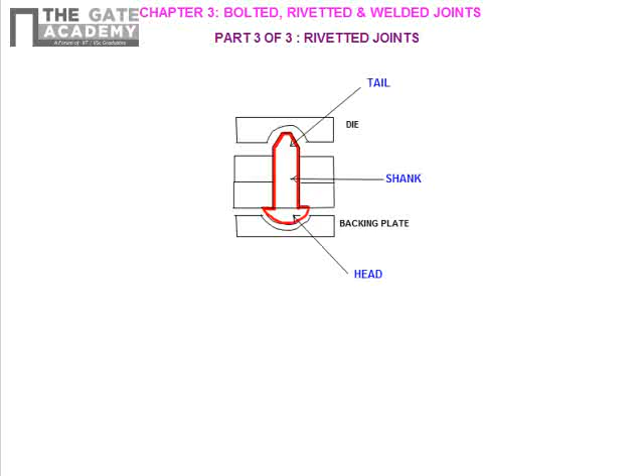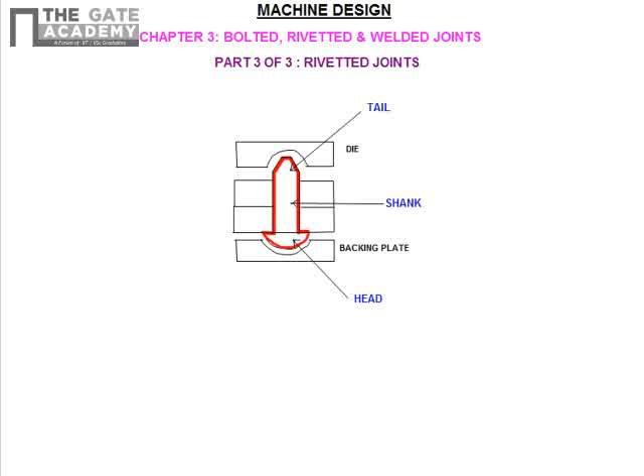So we'll come to the third part of this chapter on machine design: bolted, riveted and welded joints. The third part will be the riveted joints. Till now we have seen the bolted joint as well as the welded joints, and we have seen how to design the joints for a given kind of loading. Now we will see about the riveted joints.

Riveted joints, unlike the bolted joints, are a permanent joint in the sense that they cannot be removed at any time of assembly without causing damage to the plates.

A rivet is shown here. This rivet has three parts basically: the head is this portion, the flat portion is called the shank, and the tapered portion is called the tail. So how is this riveting done?

Riveting is done for joining two plates, 1 and 2. What we do is we drill a hole in both the plates, we bring the plates together, we keep the rivet here, and we have something called a backing plate which is kept at the head of the rivet. We have a die which has the same shape as the head, and force or pressure is applied on the die plate so that it gets deformed into a shape like this.

So you get the same kind of head on both sides after the riveting operation. The riveting operation can be done at room temperature as well as at high temperature. When the riveting is done at room temperature, it's called cold riveting, and when it is done at a higher temperature, it's called hot riveting, because it's basically causing the permanent deformation of the rivet. The tail portion of the rivet gets permanently deformed and comes to the shape of the head. So it's a plastic deformation of the material taking place.

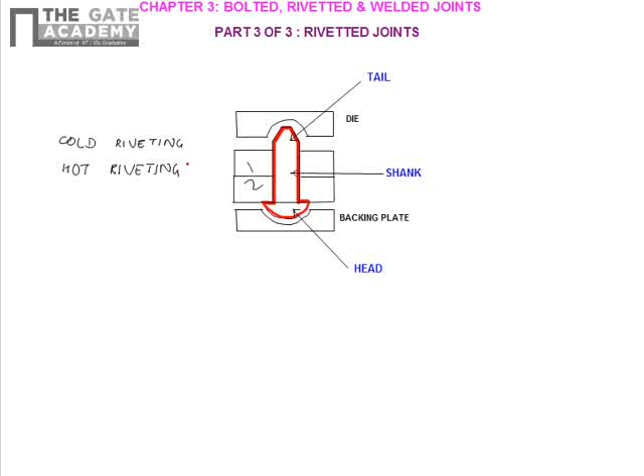Now we'll see the different types of riveted joints. Basically there are two types: one is called the lap joint, and one is called the butt joint. These two joints we have seen already in bolted joints as well as in welded joints. We'll see how a lap joint looks like.

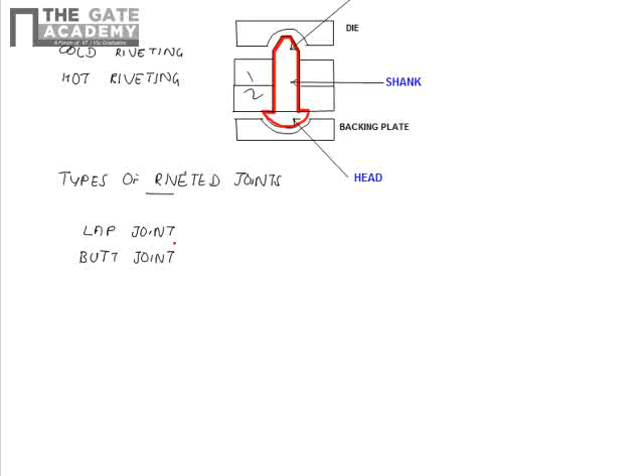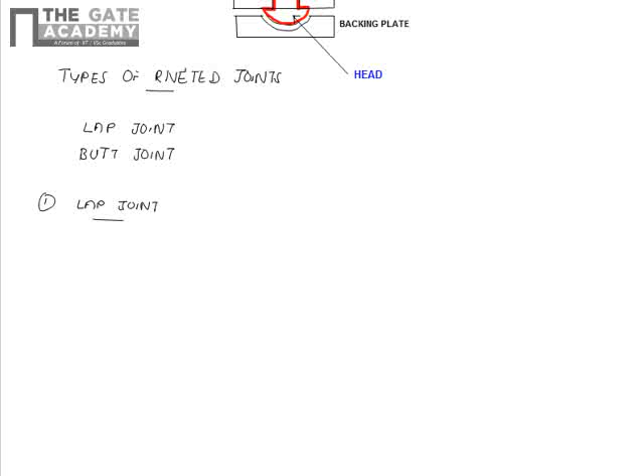Now we'll see the lap joint. The lap joint is nothing but a joint in which the plates that are to be joined are brought face to face such that an overlap exists, as shown in the figure. Then the rivet is inserted in this position, and a die plate is kept on top of the rivet, and force is applied, causing the tail of the rivet to get deformed into this shape. Thus the joining of the plates is done.

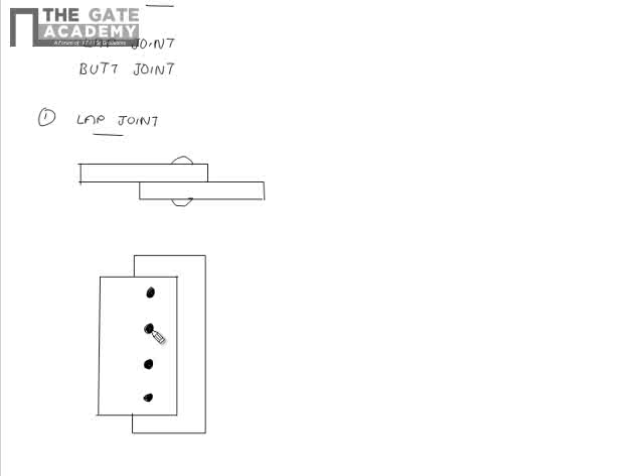So if you see the top view, you can see 4 number of rivets along the length of the plate, and this is one single row of rivet. This is a case of single row of rivet.

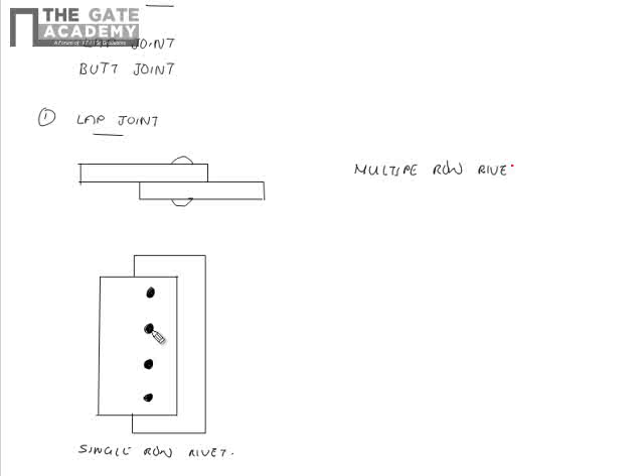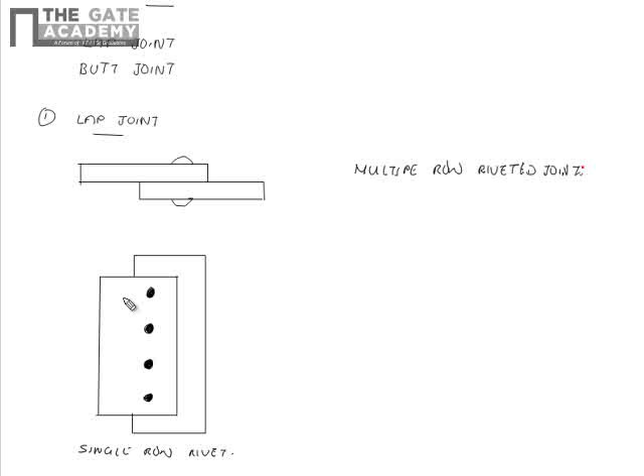We also have multiple rows of rivets. Multiple row riveted joints will be more strength joints. And when multiple rows are used, how to arrange this rivet? You can have a similar kind of rivet arrangement parallel to that, or you can have a zigzag arrangement. So we will see what is a multiple riveted joint.

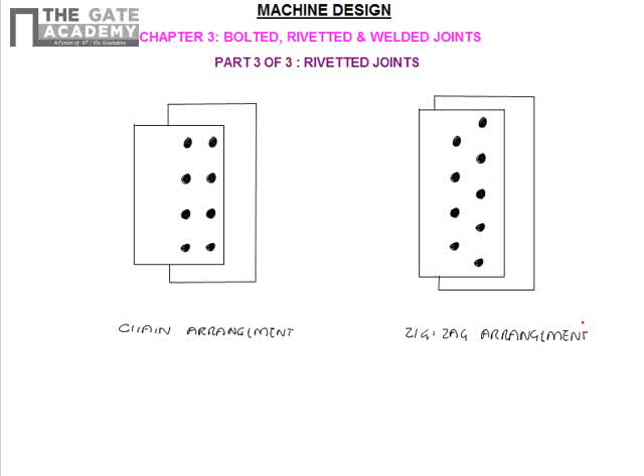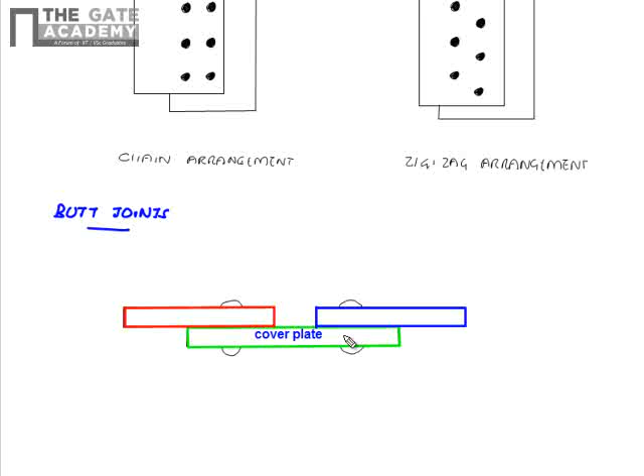Now we'll see about the butt joints. One of the butt riveted joints is shown here, in which the plates which are to be joined are brought to each other without forming any overlap, and riveted joints are formed between each of the plates and one or two of the cover plates. In this case, only one cover plate is used. These two plates cannot be joined directly, so they are joined to a cover plate which holds both the plates together. Depending on the number of cover plates, the butt joints may be classified accordingly.

Depending upon the number of cover plates, we can classify it into single strap butt joint and double strap butt joints.

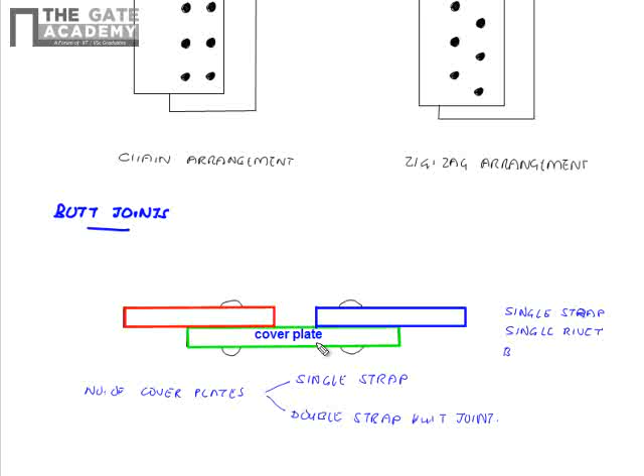The difference between single strap butt joint and double strap butt joint is that in single strap butt joint you have only one cover plate, shown here. I'll write this as single strap, single riveted butt joint, because it is having only one row of rivets and only one cover plate. Since it has one cover plate, it's called single strap. Since it has one row of rivets in one plate, it's called single riveted, and this is a kind of butt joint. A multiple rivet single strap joint is also possible.

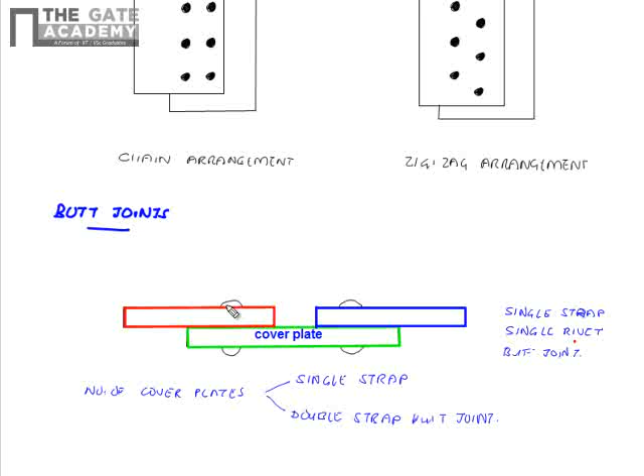When you have a second row of rivets parallel to this, it's called a double riveted single strap butt joint. Similarly, if you have one more cover plate, it's called a double strap double rivet butt joint. That is the classification of butt joints.

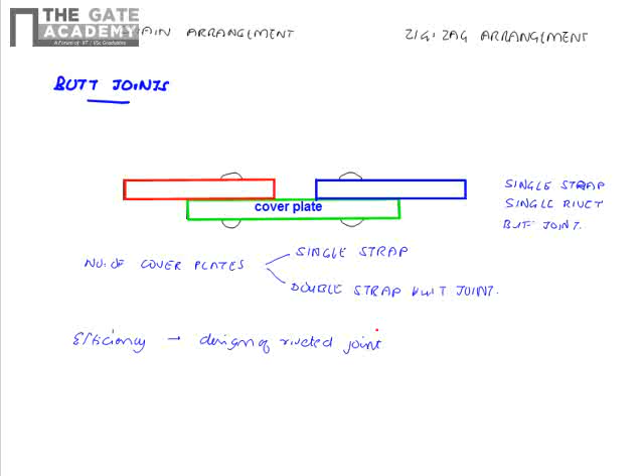So these are the two basic types of riveted joints which you are going to design, and the strength of a rivet is measured by the efficiency of a rivet. Efficiency is a parameter of importance in the design of riveted joints. We will see what is the efficiency of a riveted joint when we come to the design of riveted joints. In riveted joints, there are some basic parameters which we should know before going to the design.

Now we will see the different parameters we come across in the design of a riveted joint. Basically, the parameters are the pitch. Pitch is the distance between two centers of consecutive rivets in a single row. It can be between these two, or these two, or these two. The distance between two consecutive rivets in a single row of a riveted joint is called pitch.

Back pitch is the shortest distance between two successive rows in a multiple riveted joint, that is between two rows. This is a double riveted joint. The horizontal distance, or shortest distance, between the two rows of a riveted joint is called back pitch of the riveted joint. And we have margin, or the marginal pitch.

That is the distance between the center of a riveted hole to the nearest edge of the plate. The center of a riveted hole to the nearest edge of the plate is called margin. It can be this one, this one, or this one - any of these can be called the margin of a riveted joint. So basically, we have already seen pitch, then we have back pitch, then we have margin.

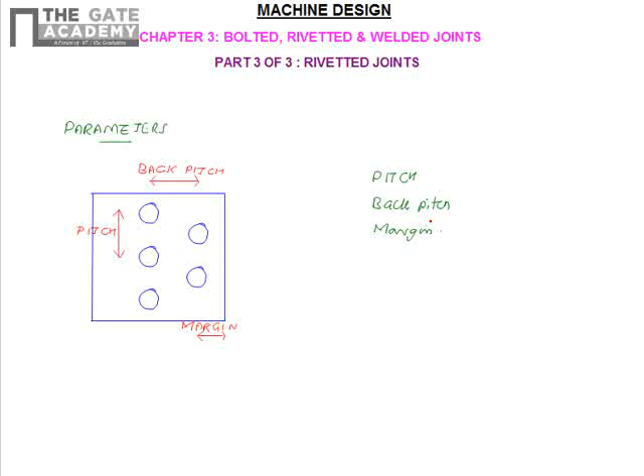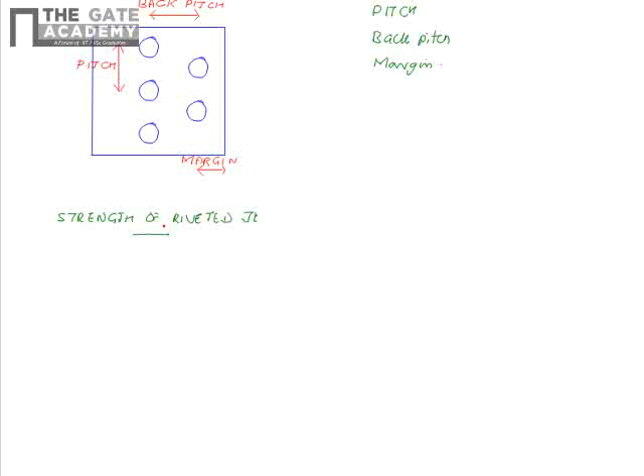Now we will come to what is the strength of a riveted joint. The strength of a riveted joint is evaluated by taking all possible failure paths in the joint into account. Since the rivets are arranged in a periodic manner, the strength of the joint is usually calculated considering only one pitch length of the plate. So we should know the different possible failure modes of this riveted joint, and based on these failure modes, we can design the riveted joints.

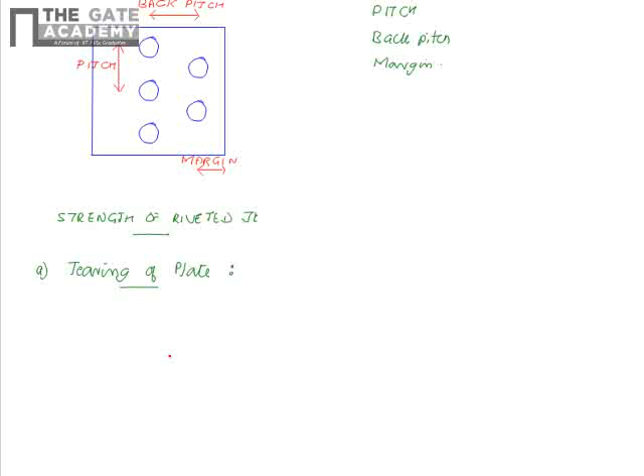The first failure mode is tearing of the plate. What is tearing of the plate? In this case, this is a single row riveted joint - it's a lap joint. When two plates are joined by this kind of riveted joint and the force is applied, one possibility is that the plate will tear between the two riveted joints. So if the plate is failing between two riveted joints, what will be the tearing area? First we will see what is tearing area.

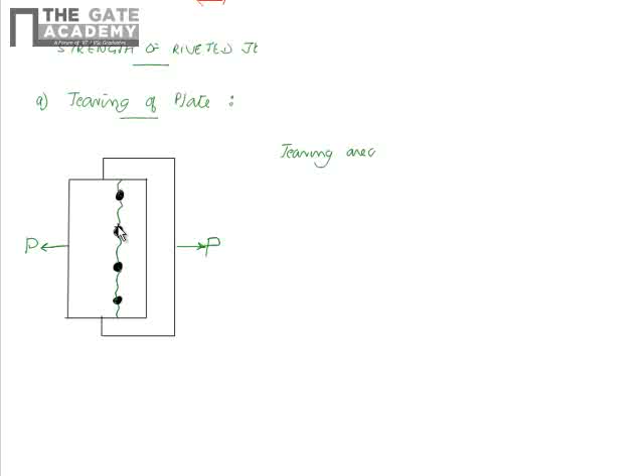Tearing area: if P is the pitch and D is the diameter of the rivet, then the tearing area will be (P minus D) into T, where T is the thickness of the plate. So T is the thickness of the plate, P is the pitch of the riveted joint, and D is the diameter of the rivet. The tearing area, that is this area of the plate, is given by (P minus D) into T. Therefore, what will be the maximum value of force that can be applied?

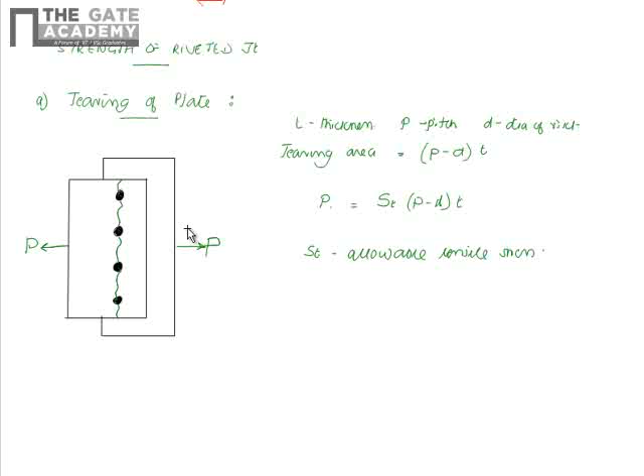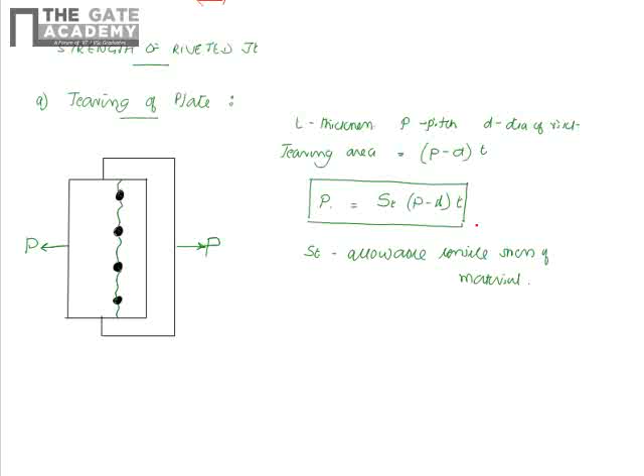Therefore, the maximum value of force, we will call P1, is given as ST into (P minus D) into T. What is ST? ST will be the allowable tensile stress of the material. If ST is the allowable tensile stress of the material, then the maximum force which can be taken by the plate is given by ST into (P minus D) into T, where ST is the max allowable tensile stress of the plate, P is the pitch, D is the diameter of the rivet, and T is the thickness of the plate. Thus we have the first equation for the tearing of the plates.

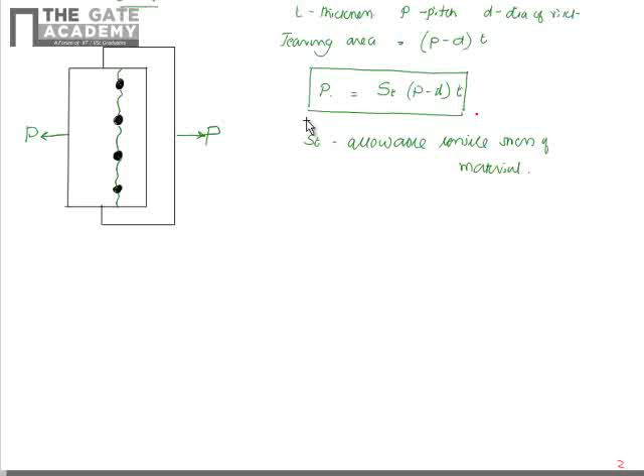Now we have the second mode of failure of a riveted joint, which is shearing of a riveted joint. If the two plates are joined like this, this is a lap joint, a single row lap joint of two plates. When the force is applied in this direction, the rivet gets sheared across this cross section. This portion of the rivet is getting sheared. Therefore we can now determine the shearing area.

The shearing area will be the area of the riveted joint, which is pi d square by 4. So we have the second equation: the maximum load which it can take by shear is given by shear strength into pi d square by 4. This is the maximum load which can be taken by a riveted joint.

This is the case of a single strap butt joint, or it can be a lap joint.

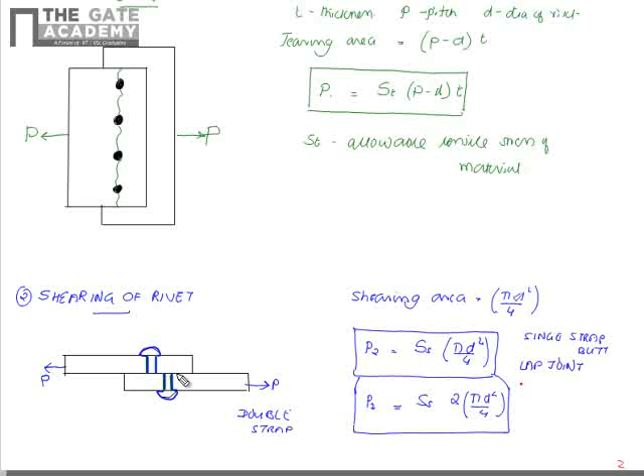Next we have crushing of rivet. We will see what it is.

Now we have the third failure mode of a rivet, which is crushing of rivet. If the bearing stress on the rivet is too large, the contact surface between the rivet and the plate may get damaged, as shown here. When two plates are joined like this in a single row lap riveted joint, and the force is applied, the rivet gets crushed against the wall of the plates.

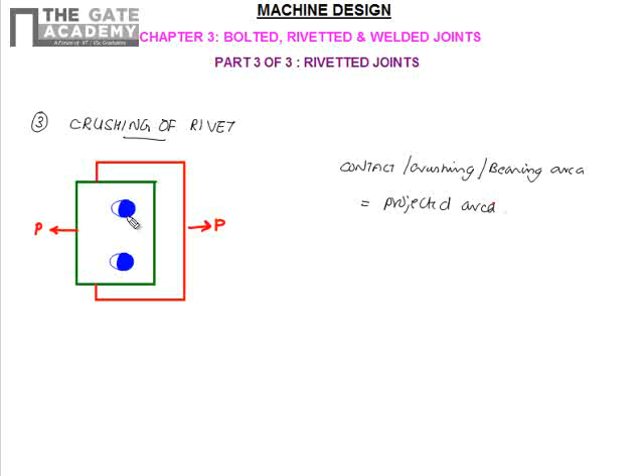In this case, the contact area, also called the crushing area or bearing area, will be a projected area. For all cases where you have bearing area, contact area or crushing area, the area should be the projected area in the direction of load. So the projected area here will be equal to D into T.

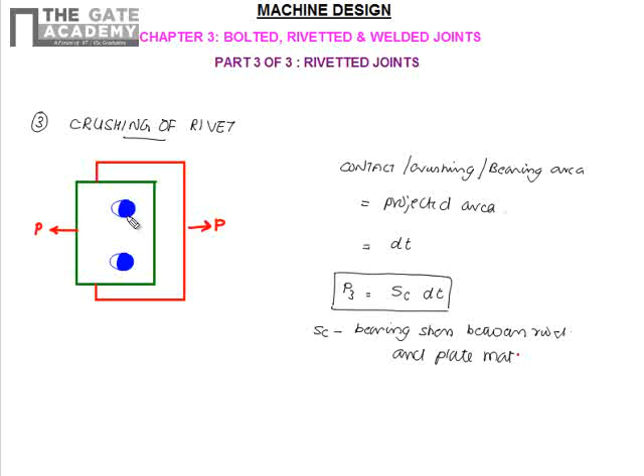Therefore we have the maximum load which can be taken by the joint without any crushing of the riveted joint, given by SC into D into T, where SC is the crushing strength, or bearing strength, of the material between the rivet and the plate material. That will be the crushing strength of the material.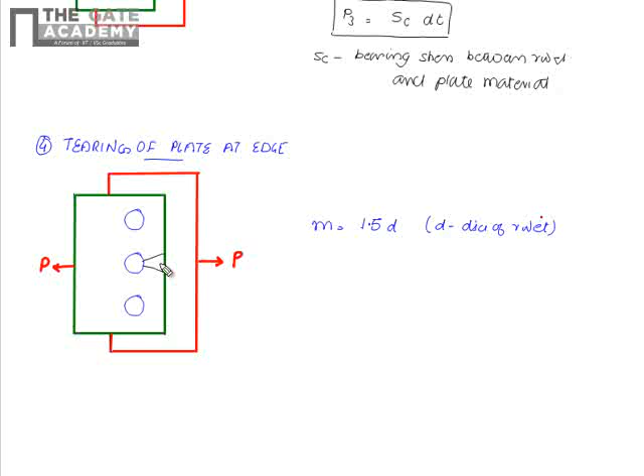To prevent this kind of failure by tearing of the plate, it is usually recommended to have a margin equal to 1.5 times D, where D is the diameter of the rivet. So the margin should be equal to 1.5 D - that is the minimum condition for avoiding tearing of the plate at the edge.

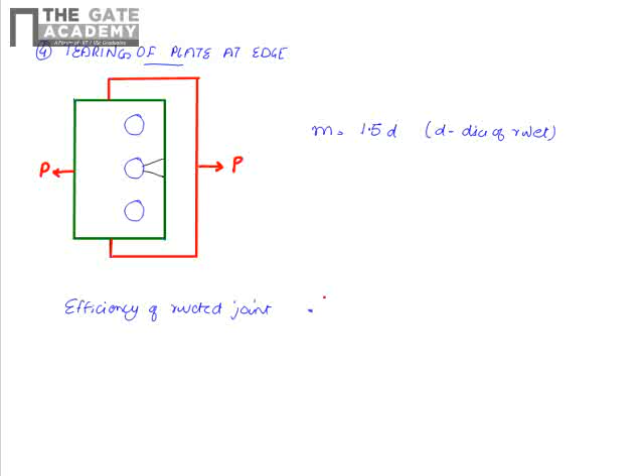Now we have already seen that the strength of a rivet is basically given by the efficiency of a riveted joint. Efficiency of a riveted joint is given as the ratio between the minimum of P1, P2 and P3, which we have seen earlier - it's not a maximum, it's a minimum of P1, P2, P3 - to the load carried by a solid plate.

If it is a solid plate, the load carried will be given as the tensile strength of the plate into P into T, where P is the pitch. Therefore the efficiency of the riveted joint is the ratio of the minimum of P1, P2, P3 to the strength of an equivalent solid plate, PT.

In double or triple riveted joints, the failure mechanism may be more than those discussed above. The failure of plate along the outer rows may occur in the same way as above, but in that case the inside row has to fail first before the outer row can fail. So the maximum allowable load such that the plate does not tear in the second row is given by P4 equals ST into (P minus D) into T, which is the maximum load taken without failure by the first row, plus minimum of P2 and P3.

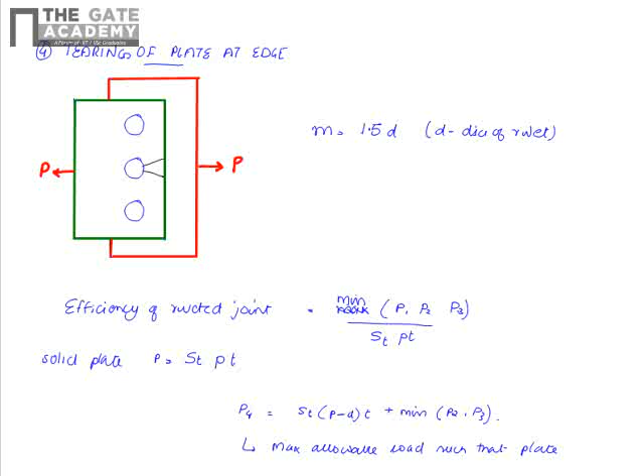This is the maximum allowable load such that the plate does not tear in the second row.

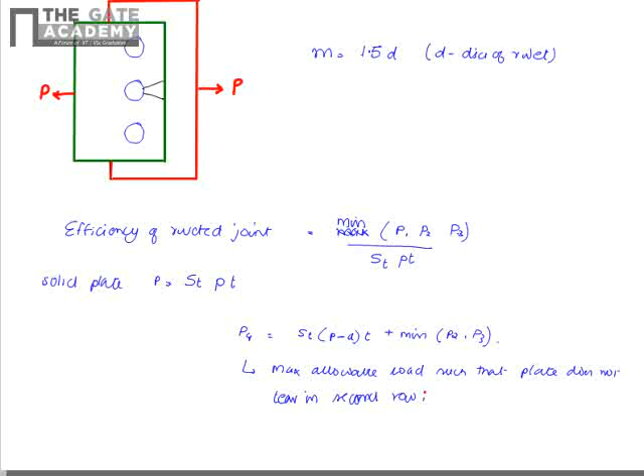So these are the different types of failure of riveted joints. Now we see, given these different types of failure for riveted joints, how will we design the riveted joints? Now we will come to design of riveted joints.

So what is meant by design of riveted joints? The design parameters in a riveted joint are diameter of the hole D, dia of hole, then we have P, which is nothing but pitch of the riveted arrangement, and M, which is nothing but margin. So given a loading condition, how do we finalize the diameter of rivet, pitch, and the margin?

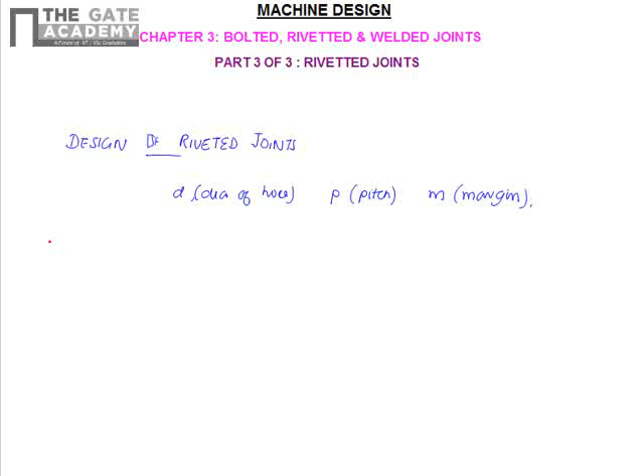First we will see diameter of rivet, or diameter of hole. For this, two conditions are there. If the thickness of the plate T is less than 8 mm, then how do we design this? We find out the diameter of the rivet by equating the crushing strength to the shear strength of the riveted joint.

So this we have already seen. The crushing strength of the riveted joint is given by SC into D into T, and the shear strength of the riveted joint in case of a double riveted zigzag joint will be given as pi by 4 d square into SS. This gives SC into T equals pi by 4 d into SS, or we can write the diameter of the rivet as 4 times SC into T divided by pi into SS.

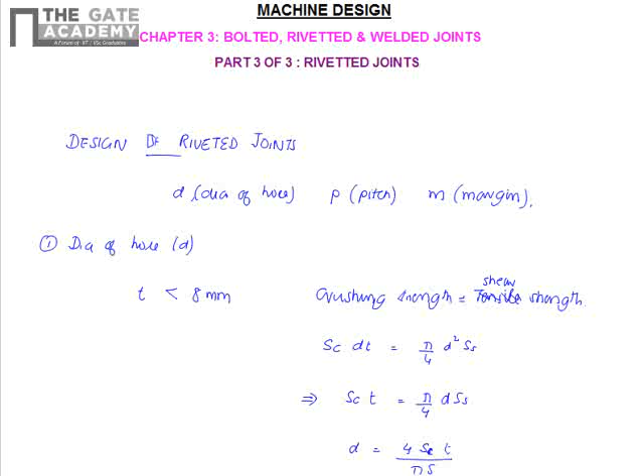This will be the diameter of the rivet or diameter of the hole if the thickness is less than 8 mm. And if the thickness is greater than 8 mm, the diameter of the rivet hole is given by 6 times square root of thickness, in mm. So that is about diameter of the rivet hole. In any case, the diameter of the rivet should not be less than the thickness of the plate. There are different standards followed in different industries, and based on that also we can do the design of riveted joints.

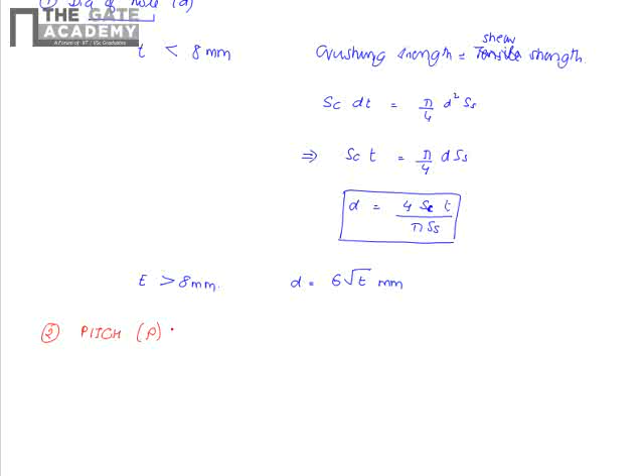So next we come to the second parameter, which is nothing but pitch. How do you find the pitch? Pitch is designed by equating the tearing strength of the plate to the shear strength of the rivet.

We have seen the tearing strength of the plate is given by ST into (P minus D) into T, equal to, for a double riveted lap joint, SS into 2 times pi d square by 4. So based on this you can find what will be the pitch of the riveted joint. This is for a double riveted lap joint.

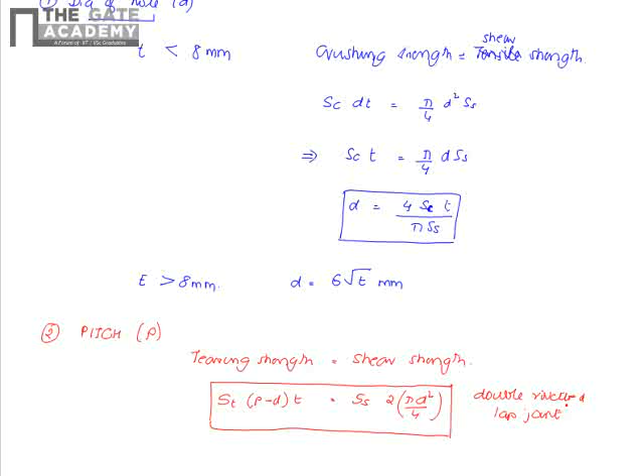For double riveted lap joint, the pitch is given by equating, pitch is always given by equating the tearing strength to the shear strength of the riveted joint. In case of a double riveted lap joint, it will be given by this relation.

Then the third parameter which we have already discussed is the margin M. We have also seen the margin M is also critical, in the sense that if the margin is too low, it will cause failure by tearing of the plate at the edge. So to avoid the tearing of plate at the edge, the margin is usually given as 1.5 times the diameter.

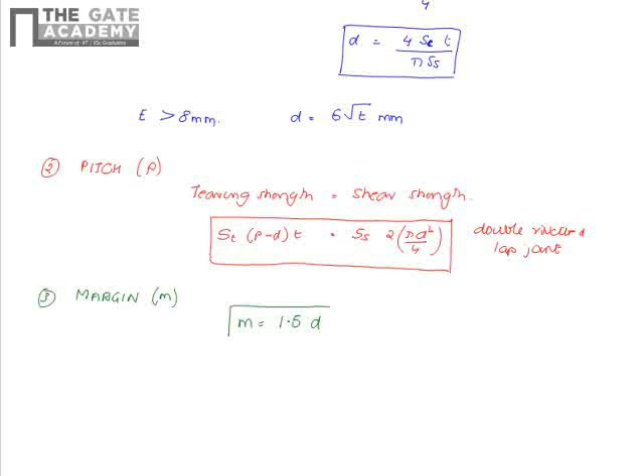So now we will see once again what we have done. Given the thickness of the plate and the load, we can find the diameter of the rivet hole by this relation or that relation, depending upon the thickness of the plate. If thickness is less than 8 mm, the diameter of the rivet hole is given by this relation, found by equating the crushing strength of the rivet to the shear strength of the rivet.

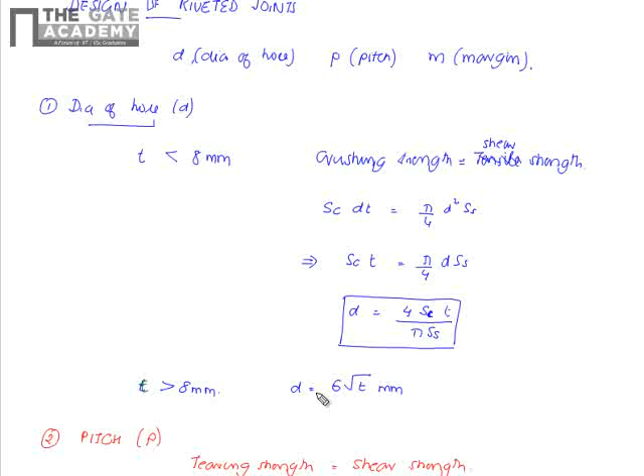Based on your riveted joint design, you can do this equation, equating the crushing strength and the shear strength, and find what will be the diameter of the rivet hole. In some cases, when the thickness of the plate is much larger, greater than 8 mm, then the diameter of the rivet is given by 6 times the root of T, in mm.

So thus we get what is the diameter of the rivet hole. Now once we get the diameter of the rivet hole, the second parameter will be the pitch of the rivet hole, that is the distance between two consecutive rivets in a single row of a riveted joint.

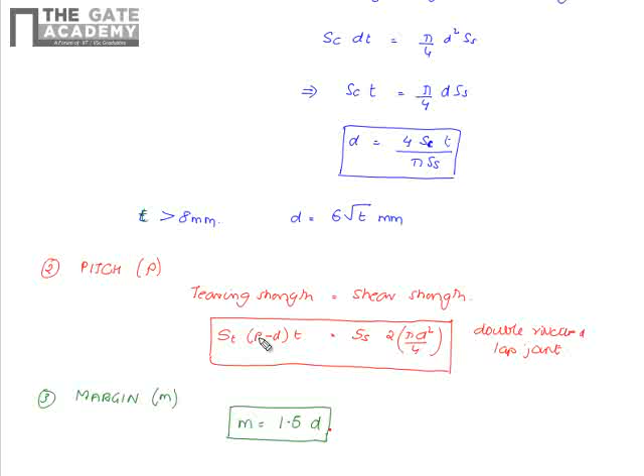That is found by equating the tearing strength of the riveted joint to the shear strength of the riveted joint. Once you know the diameter of the rivet hole from the above relation, SS and ST are the shear strength and tearing strength of the material of the rivet and the plate. Knowing these strength values, the thickness of the plate, and the diameter, the only unknown will be the pitch. So this way we can find the pitch of the riveted joint.

The third parameter will be the margin of the riveted joint. Once the diameter of the riveted hole is known, we can find the margin as 1.5 times the diameter. So this way we can do the riveted joint design. Now we'll try to solve some problems and see how we can apply these design principles.

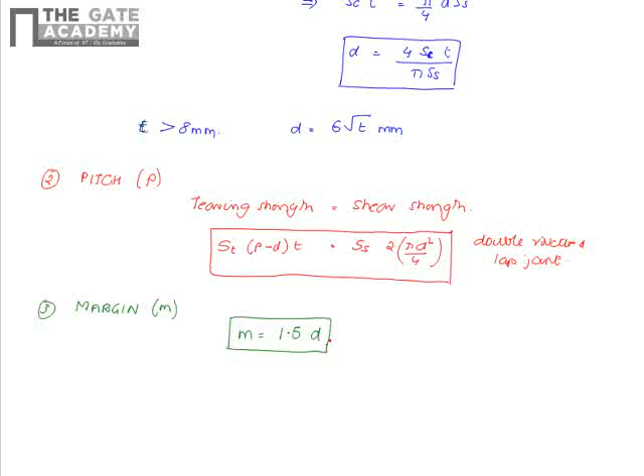Okay, now we'll try to solve one problem. A single riveted joint of 6 mm plates with 20 mm dia rivets having a pitch of 50 mm, the tearing resistance of the plate... so what will that be? We'll list out the parameters given here. We have the thickness of the plate given as 6 mm.

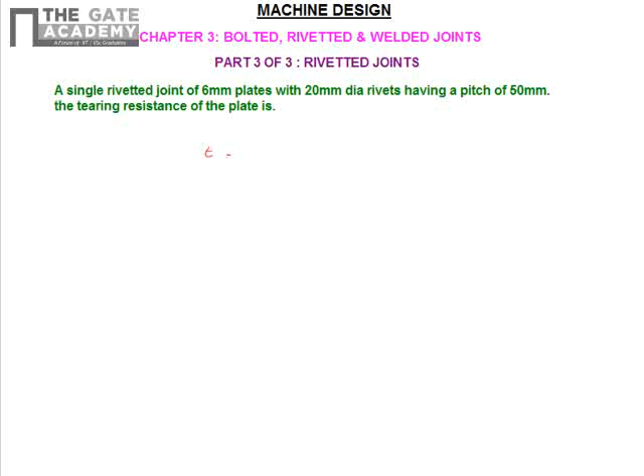And the diameter of the rivet is given as 20 mm. And the pitch of the riveted hole is given as 50 mm. And they have asked what is the tearing resistance. So what will be the tearing resistance of this?

You know tearing resistance P1 is given as ST into (P minus D) into T. So what will be ST? In this case they have given ST, the tensile stress in the plate, as 12 kgf per mm square.

If this is given, we know that P1, the maximum tearing resistance of the plate, is given as ST into (P minus D) into T, where ST is the tensile stress in the plate, P is the pitch of the rivets, D is the diameter of the rivet, and T is the thickness of the plate.

So in this case, it will be how much? 12 into, what is P? P is 50 minus D is 20. We'll keep the units in mm only, since the tensile stress is in kgf per mm square, so we get the resulting answer also in kgf. Into thickness, which is 6 mm. So what will this give? It will be 12 into 30 into 6, so this will be 2160 kgf. This will be the tearing resistance in the plate.

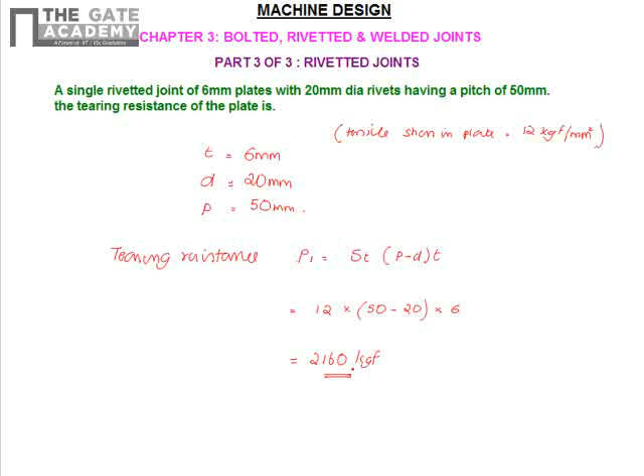Now we will see another problem. The force required to punch a hole of 20 mm dia in a 5 mm thick plate with UTS of 250 megapascal is what? Now when you are punching a hole of 20 mm diameter, so it's not 20 meters, it is 20 mm. I will draw it like this: you're punching a hole of 20 mm diameter on a plate of thickness 5 mm. This is 20 mm dia.

So if this is the case, what is actually the shearing area in this? In this case we have to find what is the force required. We are given the UTS value, so we only have to find out what will be the shearing area. Can you tell me what will be the shearing area?

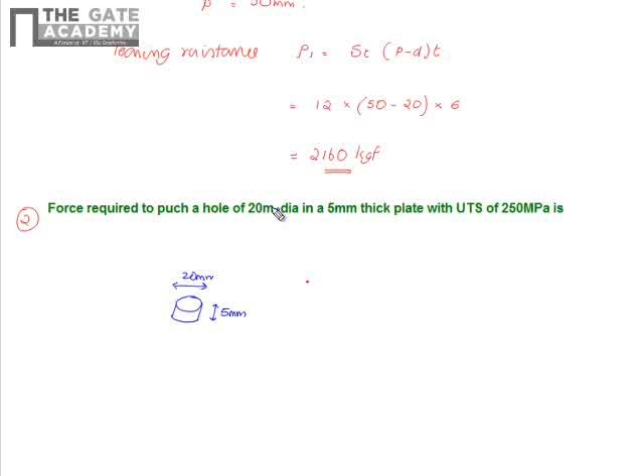So just try to visualize the problem. You have to make a hole in a plate. So when you are punching, how are you getting the material to be sheared? You are shearing the material along the circumference of the hole. Therefore the shearing area will be this area, and what will be this? It will be the perimeter or circumference of the hole into the thickness.

So the shearing area in this case will be pi D into T. So this will be pi into 20 into T, where T is 5 mm.

So what will be the force required? Force required will be the ultimate shear stress value into the shearing area. That will be 250 megapascal, which is 250 into 10 power 6 pascals, into the area which is 20 into 5. Since the pascal unit is in newton per meter square, we will convert this area also into meters.

Millimeter, when you convert to meter, you multiply by 10 power minus 3. Here there are two dimensions, 20 and 5, so this becomes 10 raised to minus 6. So what will this be? 250 into 10 power 6 into pi into 20 into 5 into 10 power minus 6.

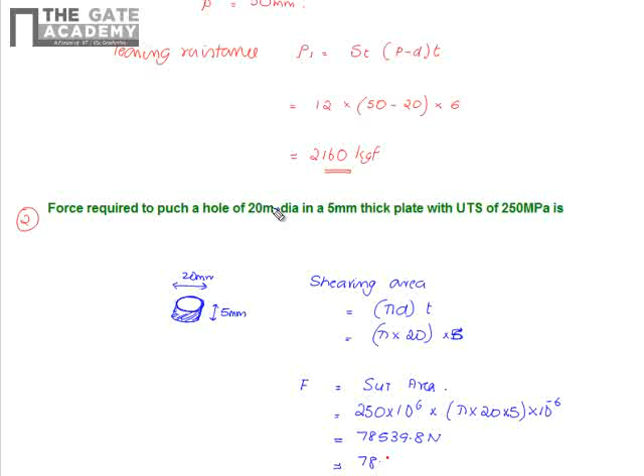So this will be 78,539.8 newtons, or I can write this will be equal to 78.54 kilonewtons. So this will be the force required to punch a hole of diameter 20 mm in a 5 mm thick plate.

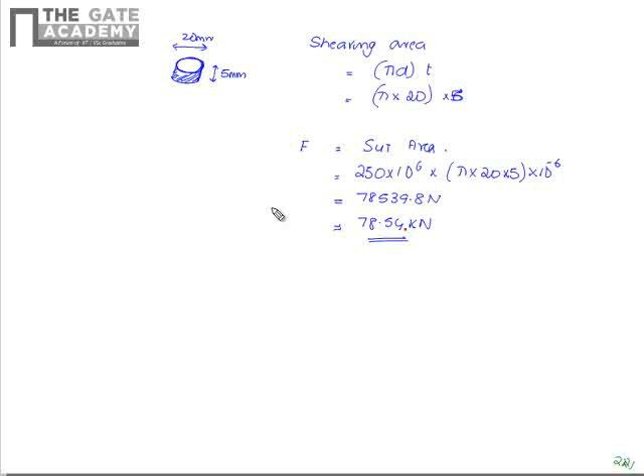Now we will see another problem. A bracket is rigidly mounted on a wall using 4 rivets as shown here. Each rivet is 6 mm in diameter and has an effective length of 12 mm. Now, what will be the direct shear in the most heavily loaded rivet?

Now which will be the most heavily loaded rivet in this? We know it will be the top 2 rivets that are the most heavily loaded, and the eccentric loading of a rivet is the same as the eccentric loading of bolted joints. So we will not be discussing that here because it has already been discussed in bolted joints.

The only difference is you have to find the resultant maximum shear in all the joints, and you have to design the riveted joints to take the maximum shear, which will be the resultant of the direct shear stress as well as the secondary shear stress.

The direct shear stress is caused directly by the load, and the secondary shear stress, or the normal stress, may be caused by torsion or bending. In this case, the secondary stress will be a normal stress caused by the bending of this plate.

When you apply 1000 newtons here, in each rivet you will have the direct shear and a normal stress, which is the bending stress. Therefore what will the resultant be? The resultant will be given by the principal stress, because one is shear and one is normal. Therefore the resultant will be given as square root of sigma square plus 3 tau square.

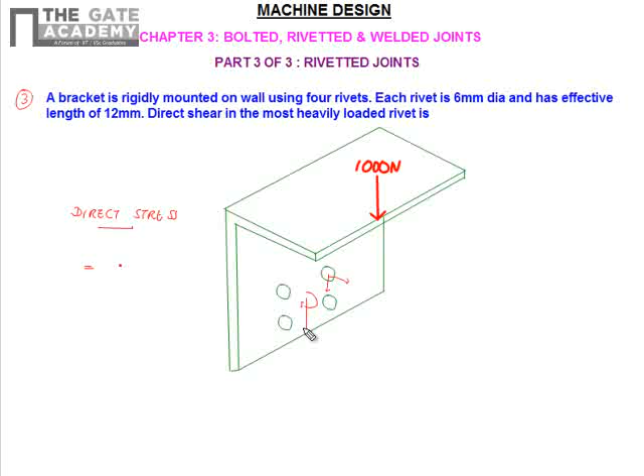So what will be the direct shear stress in the lower joints? Direct shear stress will be the stress caused by the load directly. Direct stress in all the riveted joints will be the same, which will be given by the direct shear, with the load acting on it being 1000 by 4.

Therefore the shear stress will be given by the force divided by the shearing area. This will be 1000 by 4, which is 250 newtons. Therefore 250 divided by pi d square by 4, where d is the diameter of the rivet, 6 mm, so I can write it as 0.006 squared divided by 4. So what will this be? 250 divided by pi into 0.006 square divided by 4.

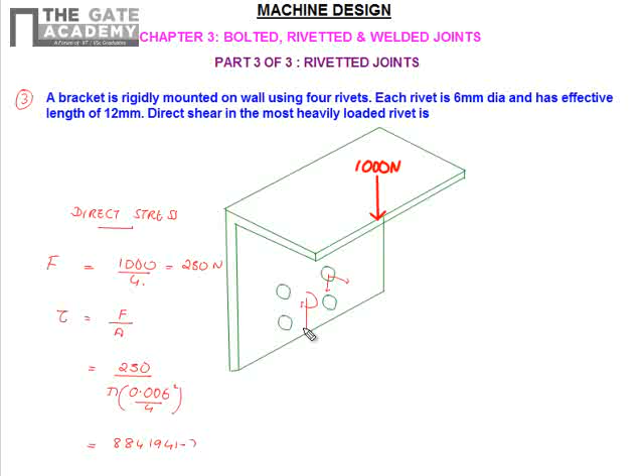This will be 8,841,941.28 pascals, or newton per meter square. This will be equal to 8.8 megapascal. This will be the direct shear in the most heavily loaded riveted joint.

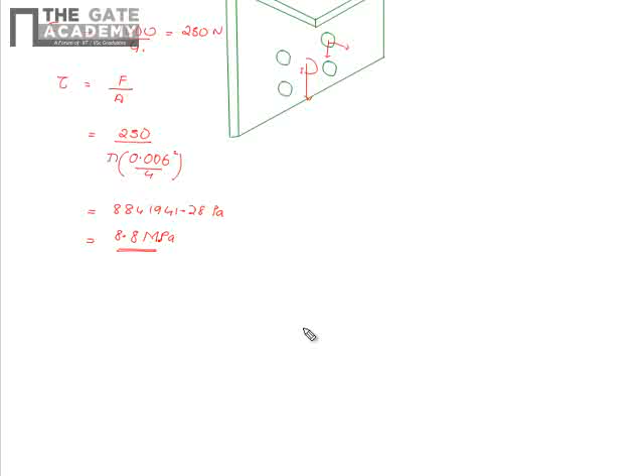This question is very simple, and this question was asked in GATE 2010. So it's just an application - once you know the concept, you can easily find out the direct stress that we have seen here, and you can easily score the marks. This was asked in GATE 2010.

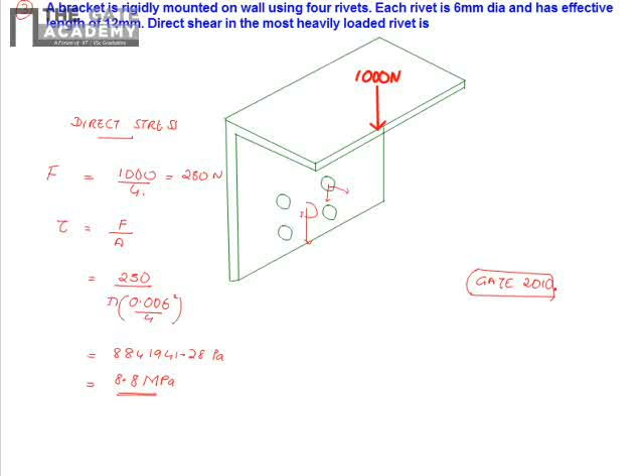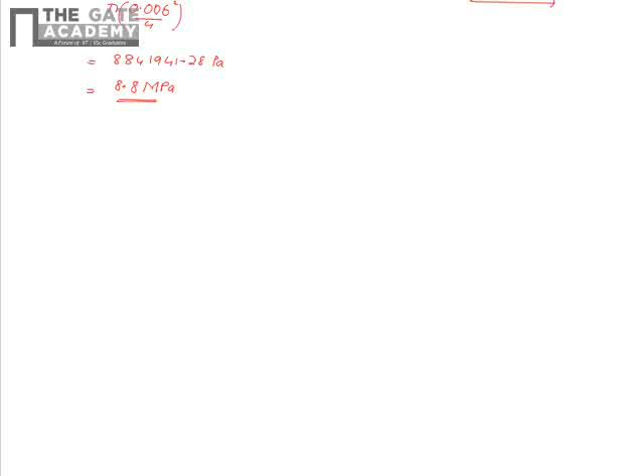As I have already told you, the riveted joint design is almost the same as the bolted joint design. Therefore, the problems will be quite similar. Eccentric loading of riveted joints is the same as the eccentric loading of bolted joints. So once you know the concept in bolted joints, you can apply the same concept in the design of riveted joints also.

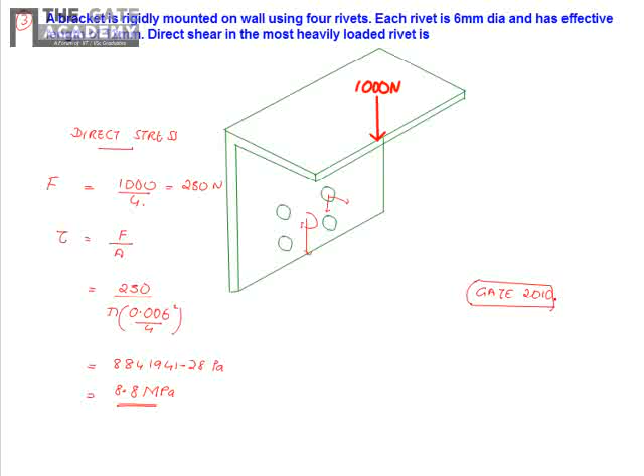With this, we come to the end of the design of riveted joints, and also we come to the end of this third chapter on the design of riveted joints, bolted joints and welded joints. Thank you.